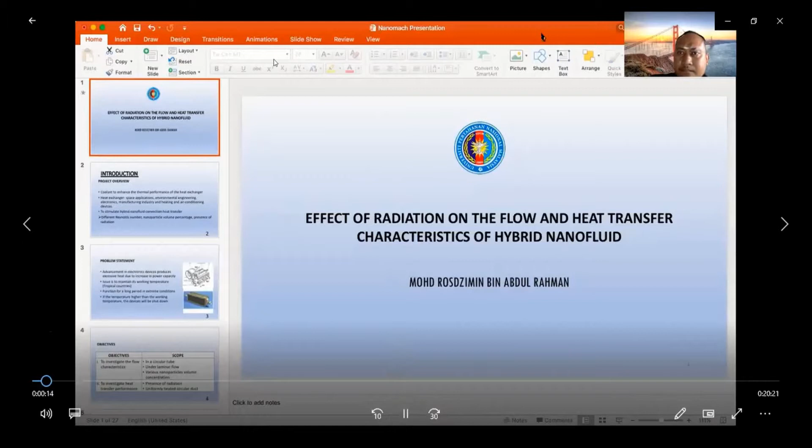Okay, good afternoon. So today I will present my research on the study of the effect of radiation on the flow and heat transfer characteristic of hybrid nanofluid. My name is Mohd Rosdzimin Abdul Rahman. I'm from the Universiti Pertahanan Nasional Malaysia, from Malaysia.

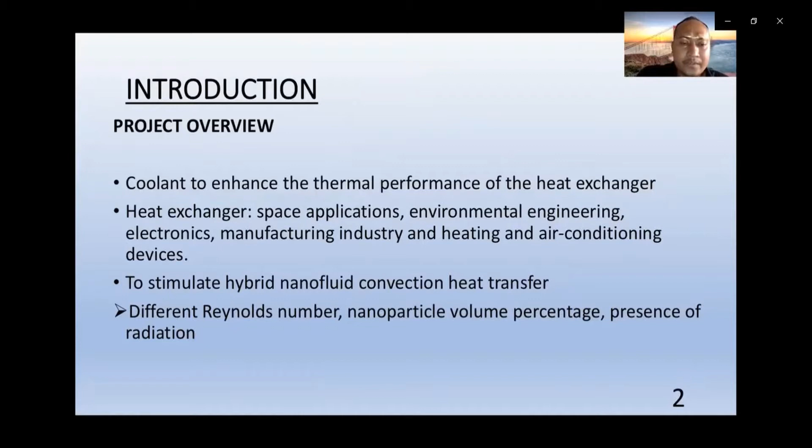Okay, first I would like to present the introduction of the project overview. So we know that the heat exchanger requires special coolant to enhance the thermal performance, and this exchanger is required for space application, environmental engineering, electronics, industry, manufacturing, and industry heating and air conditioning devices. This coolant also needs to stimulate the convection transfer, where we need a special fluid that can enhance the performance of the heat transfer. So this study is required to study the effect of the different nanoparticle volume percentage in the presence of radiation.

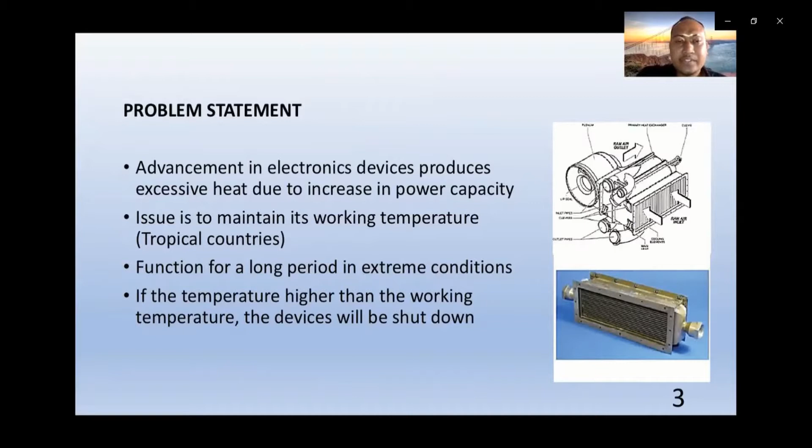So we need to maintain the working temperature of the device, because if the device is working for a long period in extreme condition and the temperature exceeds the maximum working temperature, then the device will shut down. So that's why we require a special fluid that we can use to enhance the performance of the heat exchanger to reduce the temperature of the electronic devices.

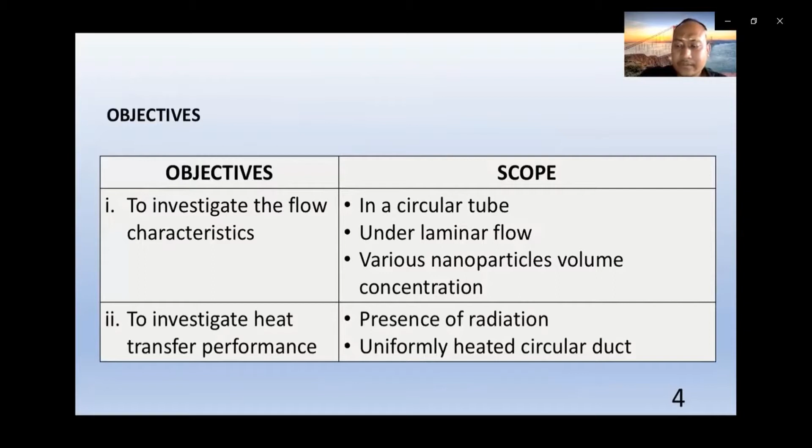Okay, the objective of this study is to investigate the flow characteristic and to investigate the heat transfer performance. The scope, so we are using the circular tube by focusing on the laminar flow and at various nanoparticle volume concentrations. And also we introduce the radiation effect, and this tube is uniformly heated. The particles that we use in this study are copper and aluminum oxide. These two nanoparticles will mix to make a hybrid nanoparticle.

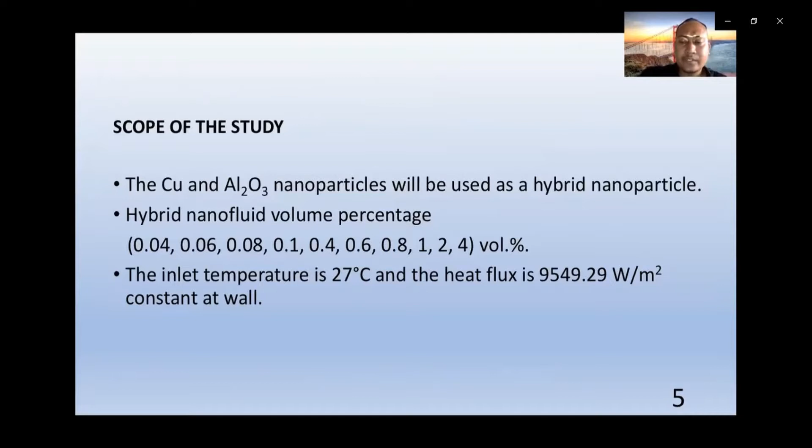So the volume percentages that we're going to study are 0.04, 0.06, 0.08, 0.1, 0.4, 0.6, 0.8, 1, 2, and 4. The inlet temperature is maintained at 27 degrees C, and the uniform heat flux is made constant with a value of 9,549.29.

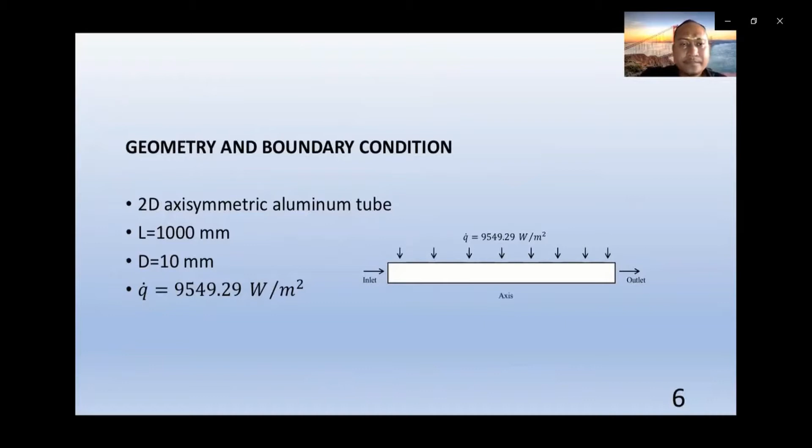This is the geometry and boundary condition of the numerical domain. We're using the two-dimensional axisymmetric aluminum tube. The length of the tube is 1000 mm and the diameter is 10 mm. So we have the axis symmetry because we need to reduce the computation time in order to get the better result.

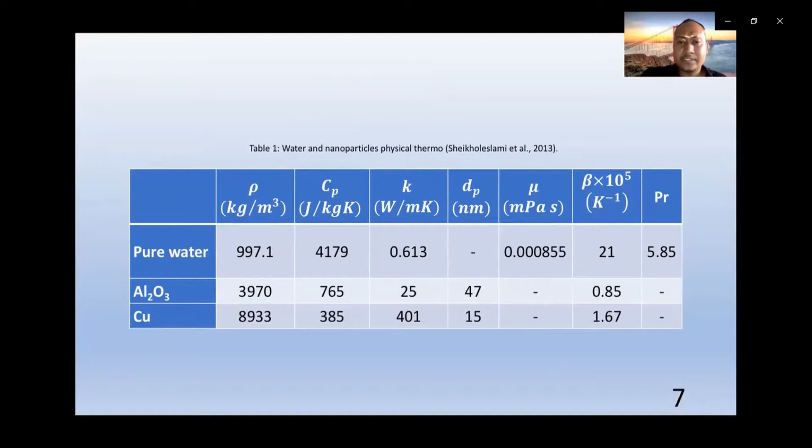And also for the copper, the density is 8,933 with a CP of 385, thermal conductivity 401, and the nanoparticle diameter is 15 nanometer. So for these properties, we refer to Sheikholeslami et al. 2013.

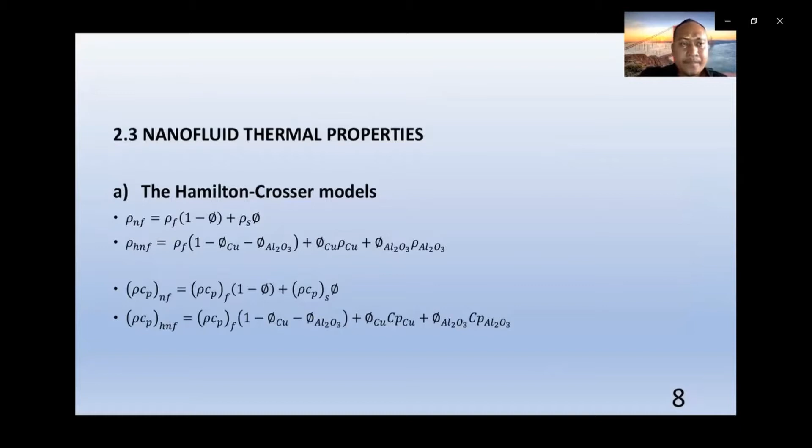Okay, to calculate the properties of the hybrid nanofluid, we are using two models. The first model is the Hamilton-Crosser model. This is the equation that we are using to calculate the density of the hybrid nanofluid and also the CP. Okay, the Hamilton-Crosser model uses the shape factor. So the M value in this equation for the thermal conductivity is the shape factor. In this study, we consider the shape factor is sphere. Only one type of shape factor that we are using is sphere.

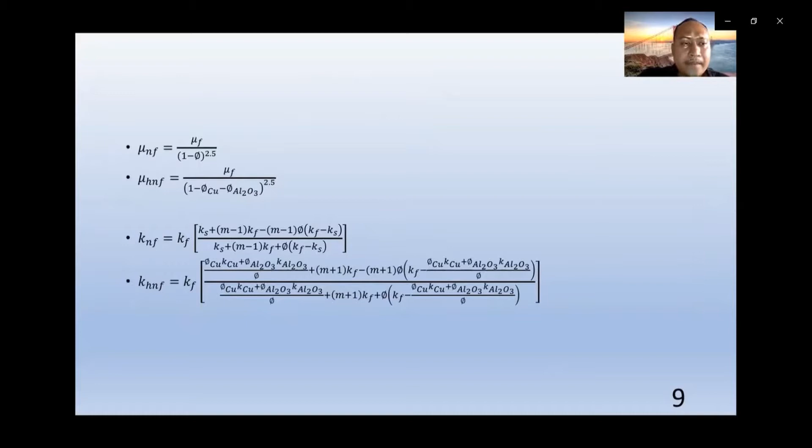Okay, the second model that we are using is the Koo and Kleinstreuer model, because we want to see the effect of the Brownian motion. In the previous model, the HC model, the Brownian effect is not considered. And in the Koo and Kleinstreuer model, or KKM model, the Brownian effect is considered to study the effect on thermal conductivity.

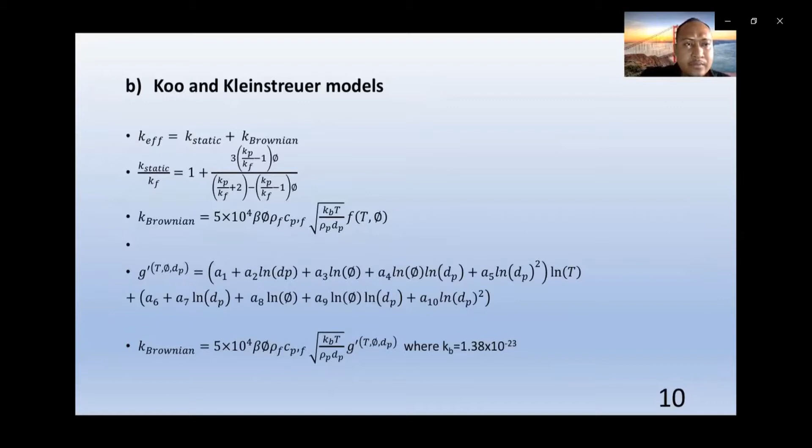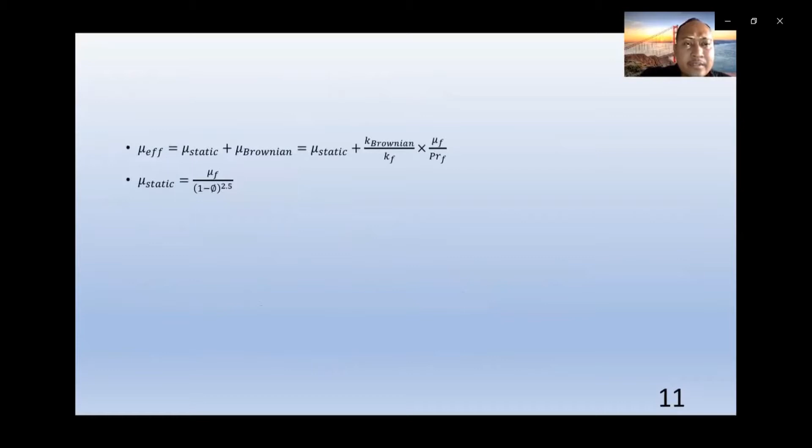Okay, this is the equation that we're using to calculate the thermal conductivity of the hybrid nanofluid. This is the viscosity, where the KKM model is taking the effect of the Brownian motion. And the radiation model that we use in this analysis is the Rosseland model. This is the well-known model to study the effect of radiation in this simulation.

Firstly, we are conducting the mesh independence study. We change the various sizes of the mesh because we want to find the lowest mesh at which the result is not changing, to use for all the simulations.

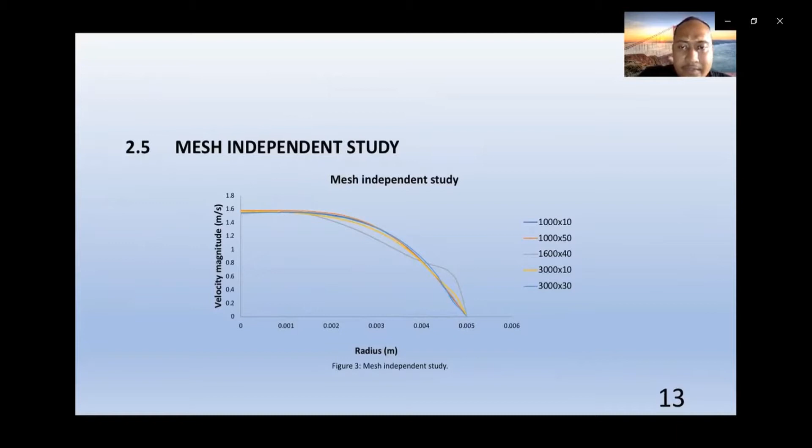In the study, we're using the 1000 times 10 size of the mesh, because as we can see from this figure, this is the velocity magnitude at the outlet, whereby the profile of the velocity is not changed significantly, even though we increase the number of mesh. So to reduce the computation time, we're using the 1000 times 10 mesh.

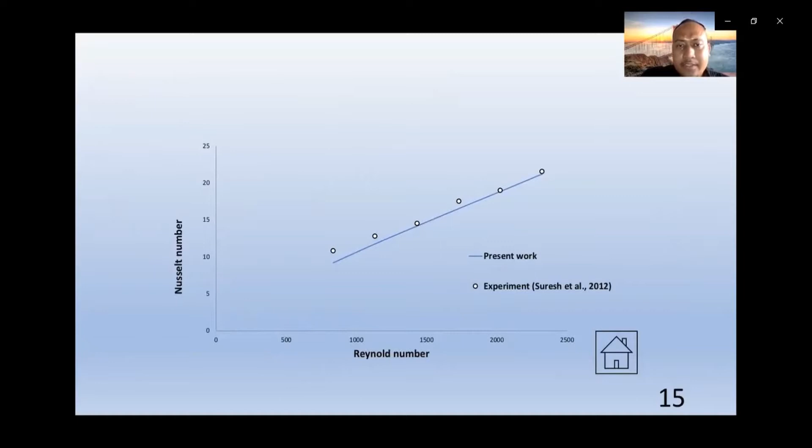Okay, so now I will go to the results and the discussion. Firstly, we validate this present numerical work with the experimental result by Suresh et al. 2012. So our model agrees with the experimental result of Suresh. For this case, for the validation, we are using water.

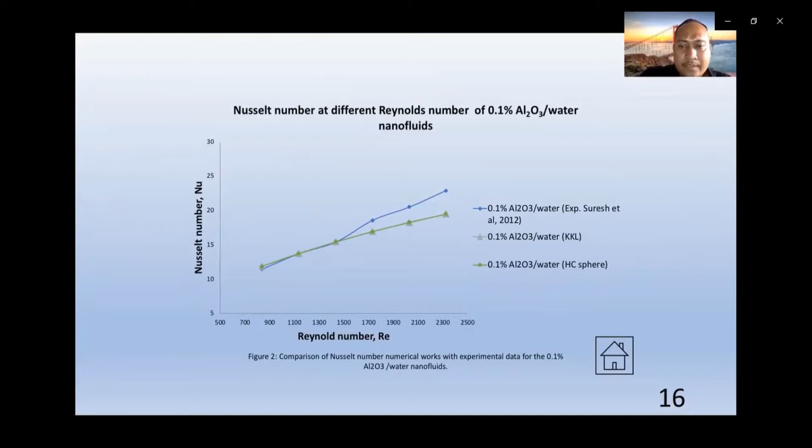Then we validate these two models, KKL and HC model, also with the experiment by Suresh et al. for the nanofluid alumina with water. So here we can see that the KKL model and HC model using the sphere type are not significantly different, but there is some deviation from the experimental result at the Reynolds number of 1500 and above. But in this case, we consider it still agrees with the experimental result.

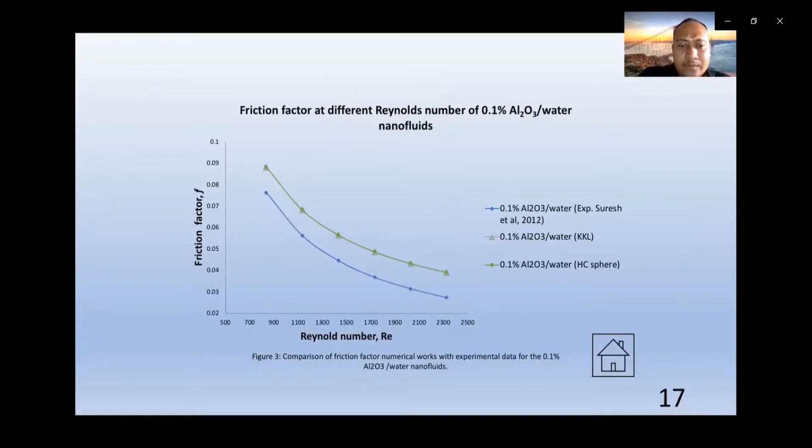And also for the friction factor, the profile of the friction factor follows the profile of the experimental result.

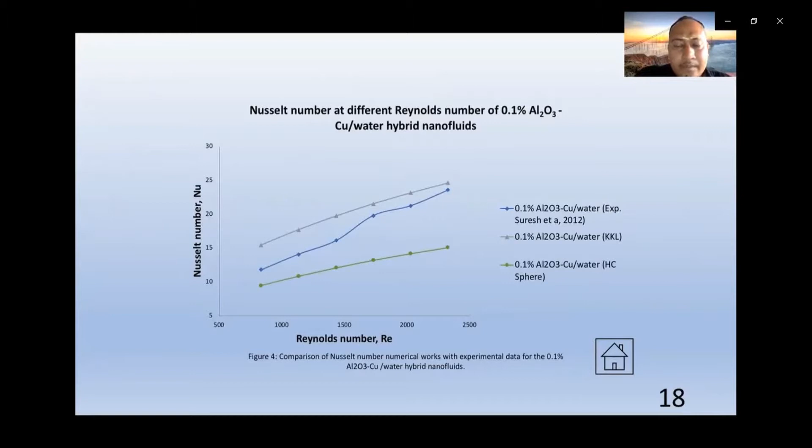Now is the result of the hybrid nanofluid from our model, and we compare with the experimental result by Suresh et al. So for the models KKL and HC, there is a huge deviation between these two models. For the KKL model, the numerical line is higher than the experimental, and for the HC sphere it is lower than the experimental result. But the deviation from the experimental result is less for KKL compared to HC. Therefore, we are using the KKL model throughout the simulation to study the effect of the radiation and also the effect of nanoparticle concentration.

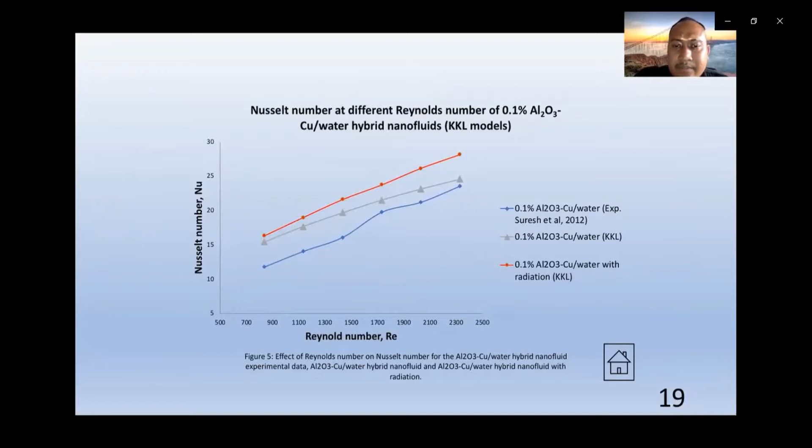Okay, then we include the effect of the radiation. We can see for both models, we're using KKL with and without the radiation. You can see when we add the radiation, the result is higher compared to the model without the radiation. So the radiation significantly affects the result of the Nusselt number at various Reynolds numbers for the hybrid nanofluid.

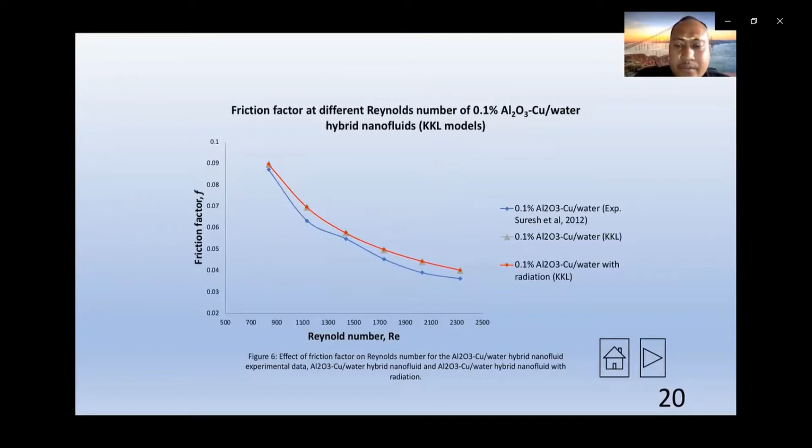And for the friction factor, there's no difference between the hybrid nanofluid with radiation and without the radiation. As we know, the radiation will affect the heat transfer, but not the flow characteristics. That's why the friction factor shows no significant difference. There's no difference between the model with radiation and without the radiation.

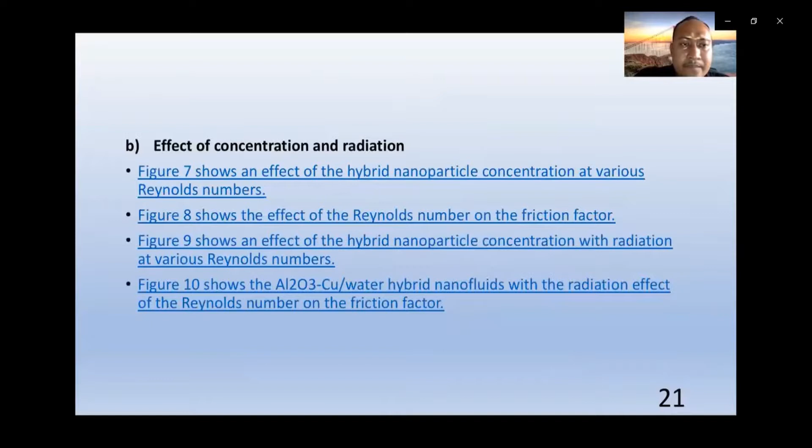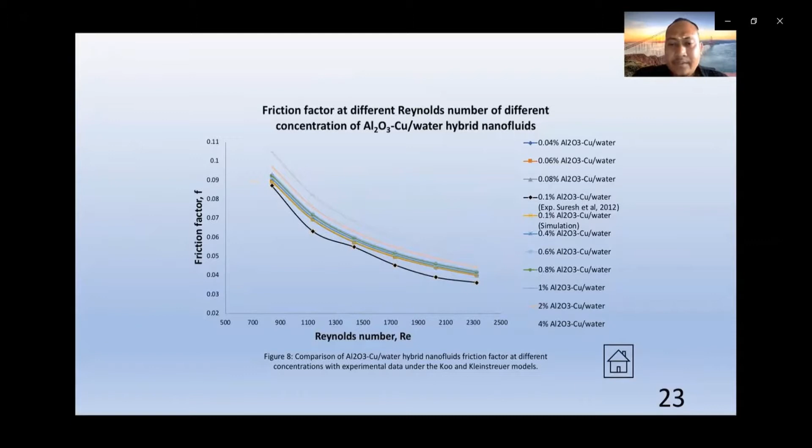And it also shows a similar trend for the friction factor. So at higher volume concentration, the friction factor is high. This is because the increase in the density and viscosity of the hybrid nanofluid will increase the friction factor, and that's why we need more pumping power to make the system work. So even though we can increase the Nusselt number at higher volume concentration, the drawback effect on the friction factor we need to consider.

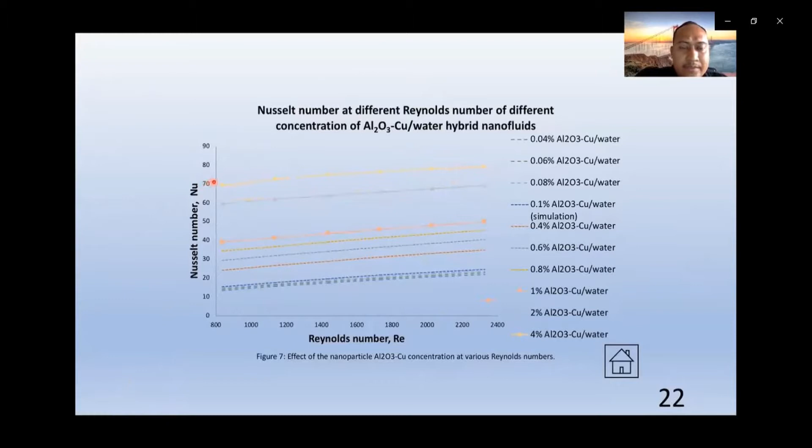And we can see also at the order of 0.01, the variation in the volume concentration is low compared to the 0.1 order volume concentration. Also, this is 1 order of volume concentration.

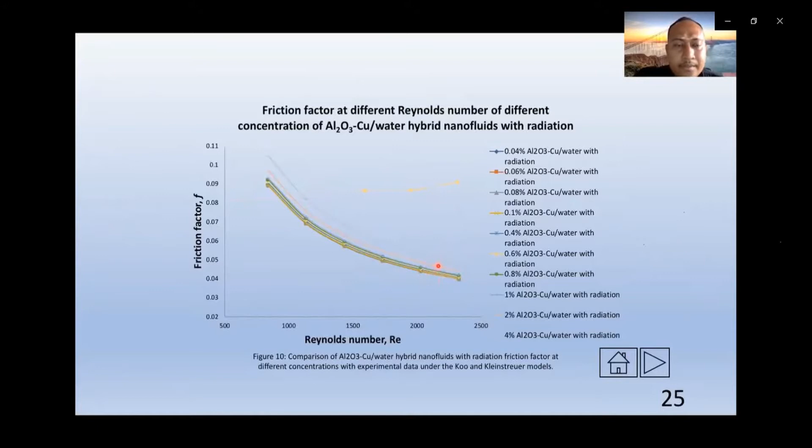So, this is the result of the friction factor. Also, a similar trend: we can see when we increase the volume concentration, the friction factor also increases. And this is all the result.

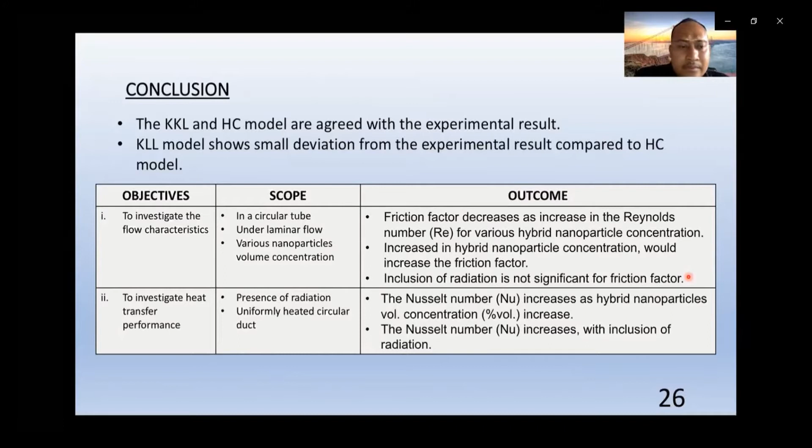And for objective number 2, to investigate heat transfer performance, the outcome we found is that the Nusselt number increased as the hybrid nanoparticle volume concentration increased. And the Nusselt number increased with the inclusion of the radiation. So overall, we can conclude that radiation shows a significant effect on the thermal performance in the hybrid nanofluid.